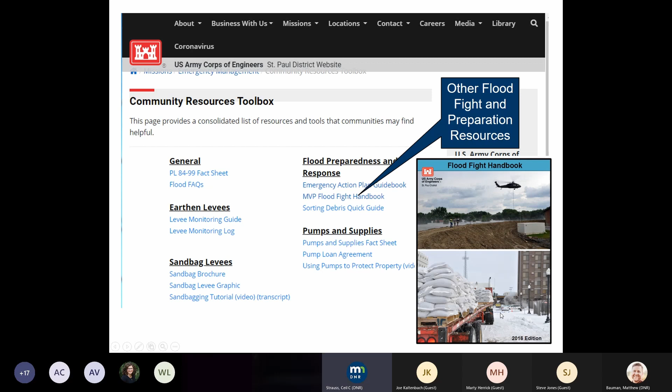The other thing they've got on this page is a link to some community resources, a community resource toolbox, and their flood fight handbook. That's where you get into more of the nitty-gritty on putting in levees and sandbag dikes and those kinds of things, and how to request resources. There's a lot of great details on flood fighting there, and they've got things like a video on how to do sandbagging. So some great resources there.

At the Department of Labor and Industry, this page gives resources on how to get help from other building inspectors from around the state, or how you can volunteer to help around the state if you're a building inspector. They do have a link to their manual, which has been updated several times over the years, and they just updated it in the past year. So if you haven't gotten the most recent copy, you might want to go grab that and review it for your community.

So a few other reminders of things you want to be looking at: communicating in your community. Who is most at risk? You know your community best. The level of risk varies a lot around the state and even within communities, so think about who within your community is most at risk, and what kind of messages they need to hear.

Some points you might want to include when reaching out to businesses or homeowners: making them aware of where they are within your high-risk mapped areas or locally known risk areas, because FEMA doesn't map all the risk areas. There can definitely be ponding areas or low areas without adequate stormwater management, or stormwater ponds put in for newer developments that could be a risk.

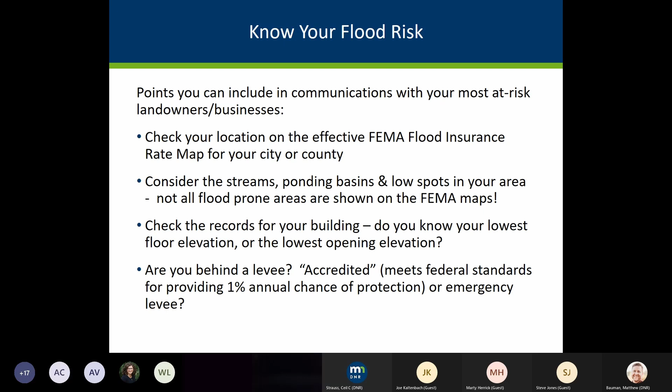Some other things to recommend to folks most at risk: consider getting flood insurance if they don't already have it. As long as your community participates in the National Flood Insurance Program, they can get a flood insurance policy. It may have been mandatory if they were in the FEMA high-risk areas, but anyone in the community can get a policy as long as your community is participating.

Look at making sure they have their records backed up off-site, and that they have an action plan to keep their business going or protect it so they can get the business started again as soon as the flood goes through the community.

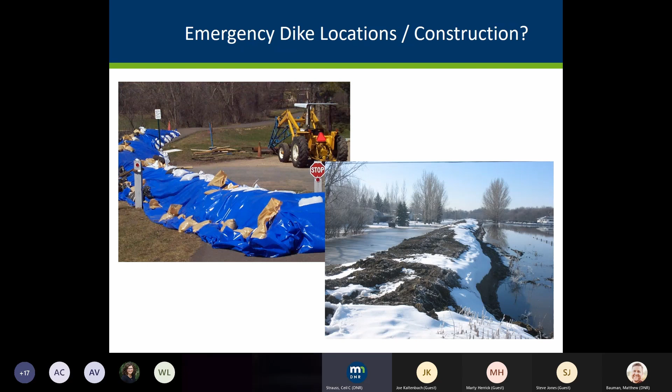So some other specifics for you at the community level to be thinking about before the flood, or when you know the flood is coming closer: if you have places where you need to be putting up barriers or dikes, know where that is in advance. You may have places where you traditionally do diking, but think carefully about where you're doing that. Make sure your levees and temporary dikes are not going in the floodway areas.

Here's where the floodway would be on an older paper map and where it would be on the newer maps, these blue and red crosshatched areas. If you put dikes in the floodway areas, you're causing increases in flood elevations beyond what's shown on your FEMA maps, because the modeling assumes those areas are left open for floodwaters to pass through your community. We mention this because we know there have been communities in the past who have put sandbags and temporary dikes in their floodways, and we don't want you doing that.

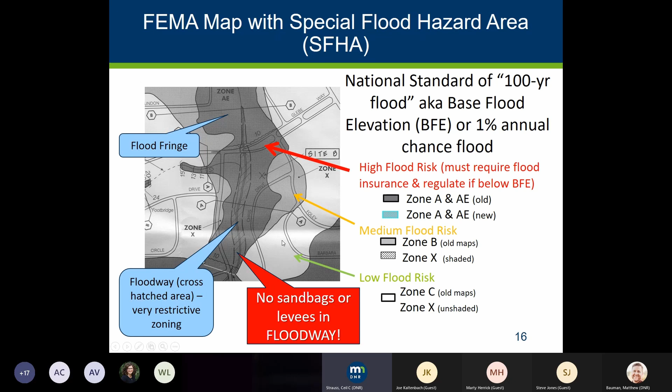Think about your critical facilities and which ones of those are at risk. Especially if you've got nursing homes, hospitals, prisons, or places with vulnerable communities, do they need to have evacuation plans in place?

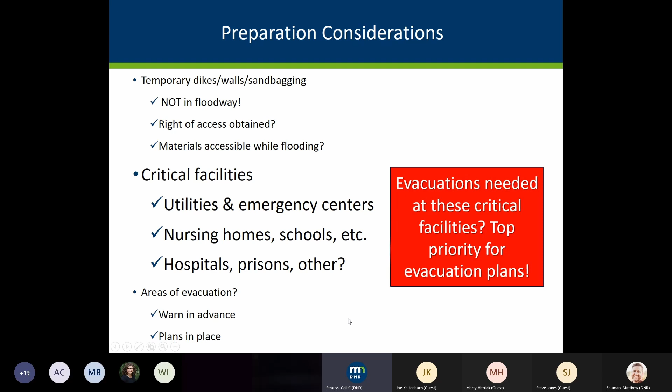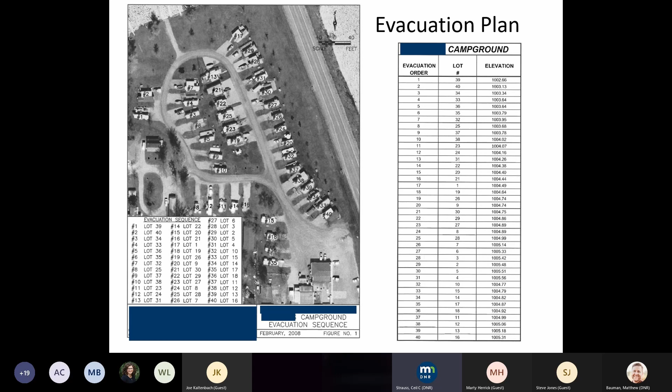A lot of this is covered again in our second video on response after a flood, so we'll talk about a few different things here. The community's first responsibilities are, of course, rescuing people. Your first responders and emergency managers are going to be out there rescuing people.

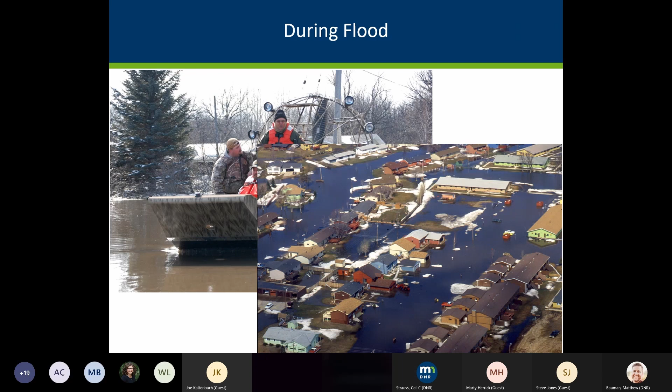While rescuing folks too, you'll get a good idea of where the areas of damage are. You'll be getting reports of damage. You'll be trying to block those parts of the road that are most at risk.

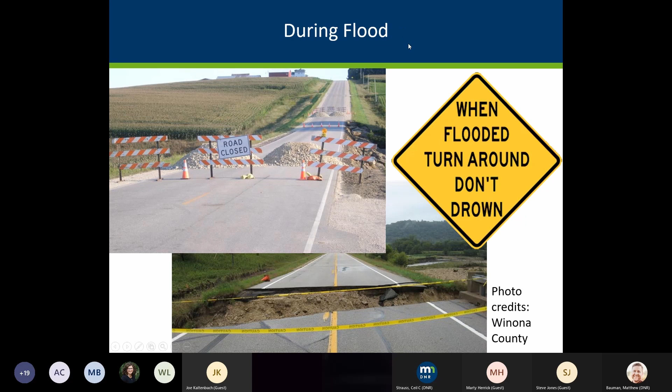A reminder that when there is flooding, the areas on the road that are covered by water - you don't know what's beneath that water surface. It can be a really dangerous situation, like here where the bridge is completely washed out, and obviously we don't want cars going through those areas. Just like nationally, in Minnesota most deaths due to flooding have been because of people trying to drive through places that maybe would have been fine during normal times, but were washed out - and that's where we're most likely to have the dramatic rescues and deaths during flooding.

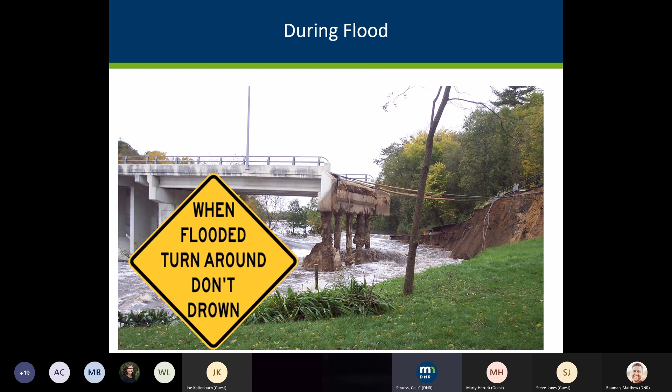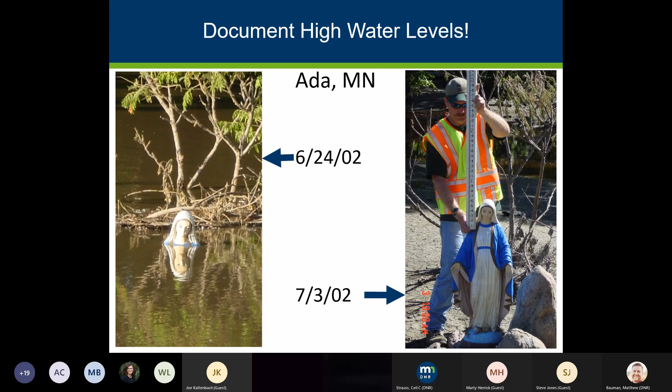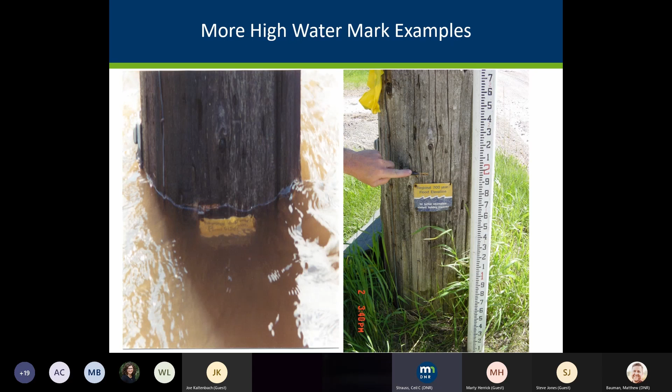And so this is an example where they put a stake, showing the flood relative to one of the official elevation markers. People will want to know how high the water really got after the flood when you're trying to figure out what the damage was and where the areas were damaged.

We encourage you to set things up ahead of time and have a way of recording what volunteers and staff are spending time responding to the flood, because you'll want that information if there is a state or presidential declaration made.

Your communications to your community are really going to be important. We've got more options now in terms of websites and social media sites, and that's definitely heavily used in more recent floods. You'll be wanting to get information out immediately about where to avoid, where the flooding is, where there's risk, where to stay away from.

And then as soon as this water starts going down, people will want to know what to do with their debris. You'll want to tell them how to schedule inspections and remind them that they need permits to do repairs or to go in and rebuild anything in your community.

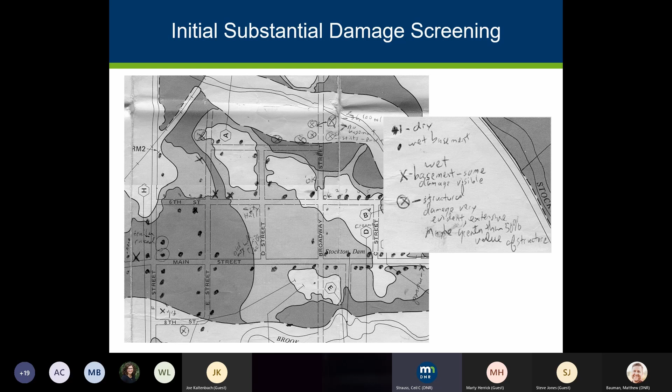One of the first things you'll be doing, in addition to the safety actions, rescuing people, and blocking areas of concern, is trying to record where you're seeing the damage. It might be in a small community something unsophisticated like this handwritten document that was done in this example by the local official and the area hydrologist at that time.

But more and more communities have GIS and are able to show that in a nice GIS format and flag properties, flag parcels, and tie it to more detailed examples. This is actually getting to be like a decade plus old example from Steele County.

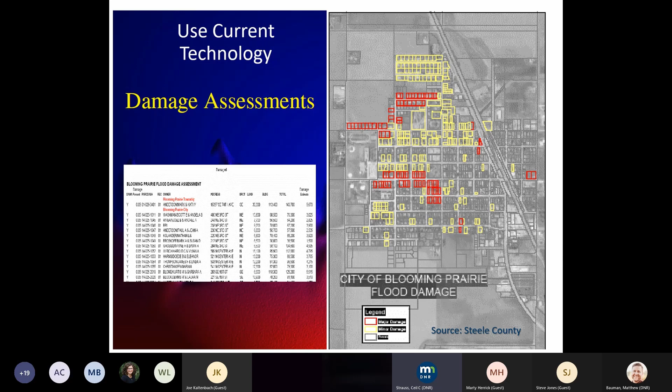First step is that you're going to be looking at whether buildings potentially are damaged and if they need to be regulated by you through your floodplain management ordinance.

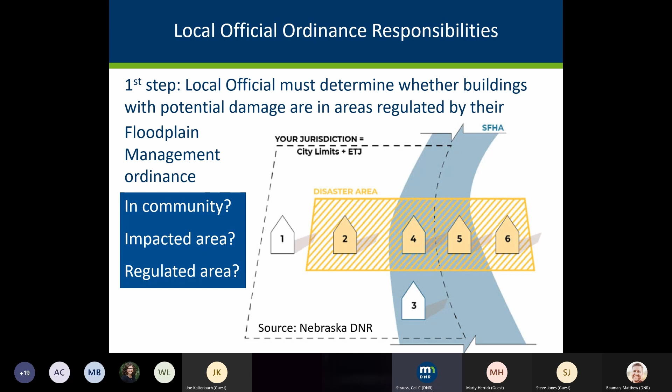First thing you look at is, is it in your community? And is it in the area that was impacted where you think there might be damage? Within that impacted area, in this example, buildings 2 and 4 are in the impacted area and within the community, but only number 4 is actually in the regulated area. The blue area is supposed to be the regulated area, the special flood hazard area. So that's where you need to make sure you're doing inspections for substantial damage and determine what is allowed to be done according to your floodplain management ordinance.

We do have this flow chart that gives some of the same key steps. This is an older document, but we still have a link to that on our website, and it steps you through, reminding you that you want to get out as soon as you can and figure out which buildings need to be looked at more closely that are within your mapped high-risk area that are subject to your floodplain regulations.

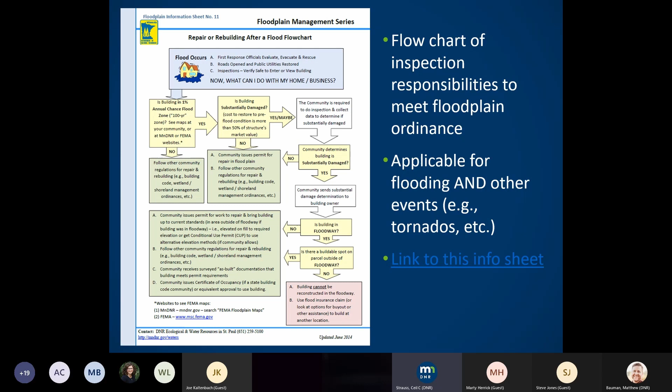When we talk about substantial damage that you're required to look at, we're looking mainly at those existing nonconformities, the things that were built before you had your map. They weren't built knowing the true risk, and they may have been built too low. But if there's damage of any origin - it could be a flood, a tornado, a fire, whatever causes the damage - if it's damaged to more than 50%, meaning the cost to repair that building to bring it back to the condition it was in before the fire or flood is more than 50% of the market value of the building, then that is considered substantially damaged.

Your ordinance says that a building that is substantially damaged needs to be brought into compliance. What's distinctive here is that it's not just the work that is actually done or that they want to do to repair - it's what work has to be done to bring it into the pre-event condition. They can't say, I'm only going to repair part of it and stay under the 50%. You need to look at the full cost to repair that building. We'll get into more detail on doing substantial damage determinations in a little bit.

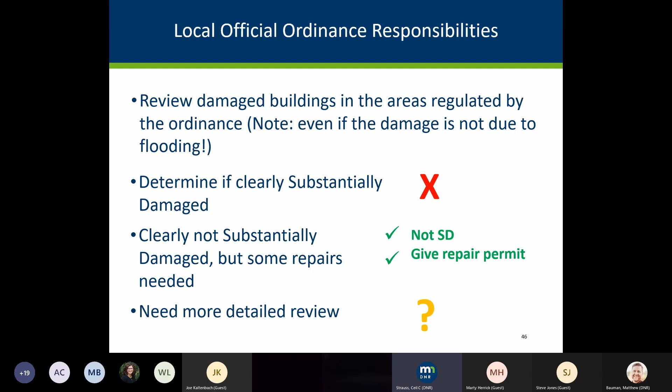So you'll be looking at all those impacted areas, and as you're out there screening, you may find other areas that you didn't initially identify.

So one of the big things after floods is looking at where those piles of debris are. That's a very good sign that there's damage in those buildings if there's piles of debris outside the homes and businesses.

So some of those substantial damage determinations will be really easy to determine. You'll see that the building is clearly substantially damaged.

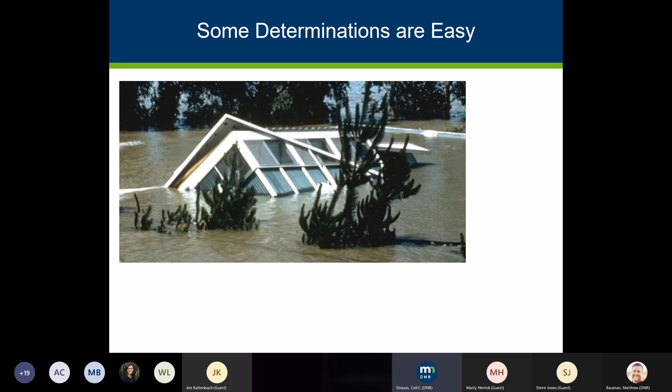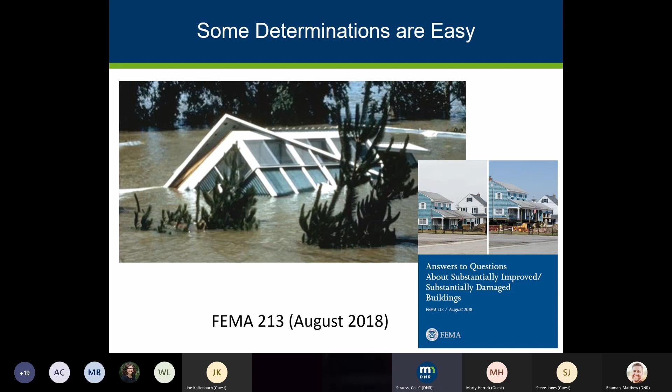This is just a reminder that there's one of the resources available, kind of an abridged version of the FEMA substantially damaged building guidance, and that's this FEMA 213.

Next slide. In basements is where we'll see a lot of the damage during floods. You want to capture those stain lines. In this example, we've got a seed line that they marked.

You're going to want to have a system set up that you've got information by each address, and you tie your photos to those addresses and your inspection records to those addresses.

In most cases, again, there's going to be some cleanup to do, and you'll be sharing information on how to safely clean up and disinfect those areas, but you can give them permits to do the repairs and do the cleanup.

Unless you see foundation damage in a basement, you might see that the furnace or the water heater is going to have to be replaced, but you don't usually see substantial damage situations there. Again, document, document, document, and keep those records by address.

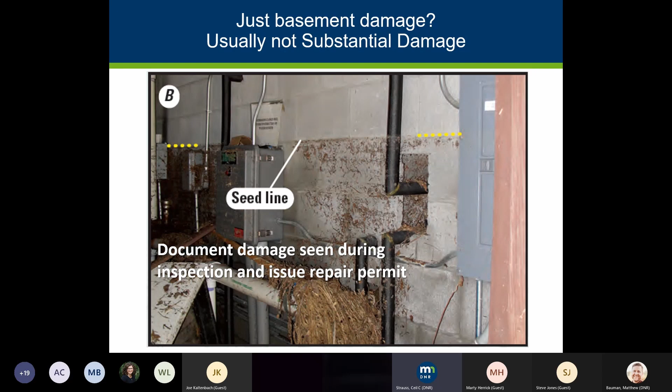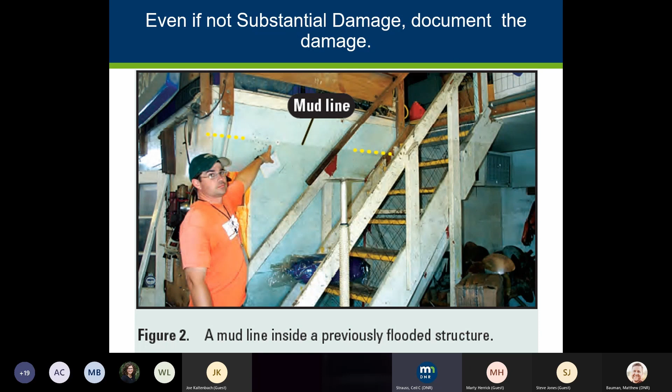So sometimes things are not what they seem from the front. Here we can see the mud line, the high water mark from the front.

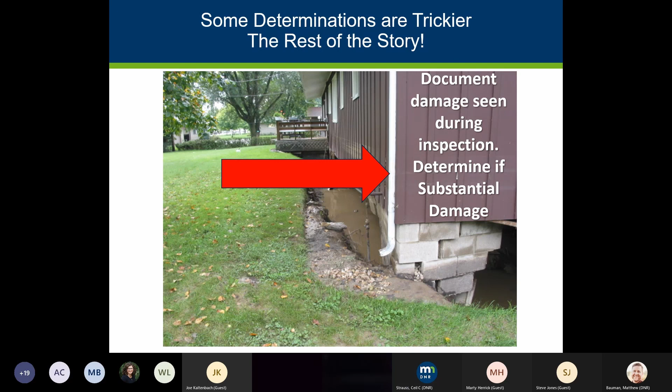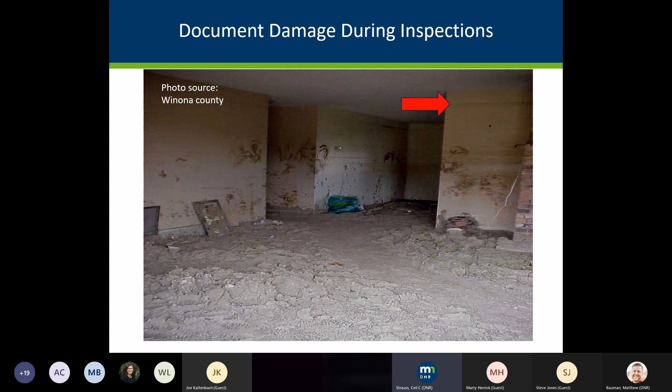In our playbook, we do have some tables, some depth damage tables. These are based on some analysis that the Corps of Engineers had done earlier. Many of the states use these depth tables to help narrow down which areas need to be looked at more closely. So it does vary depending on the number of stories and the foundation type.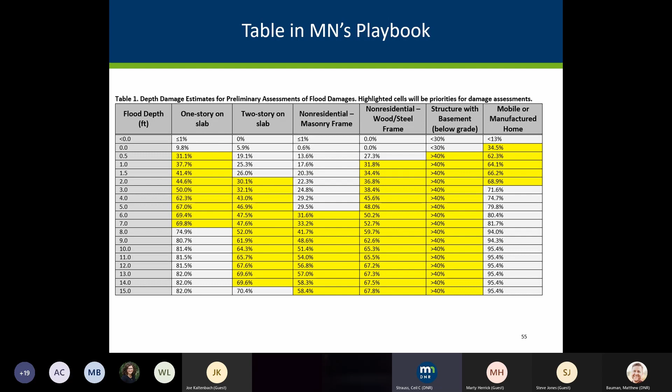This shows the 1 story on slab, 2 stories on slab. Go to the next slide.

So zooming in here on the 1 story on slab, if you've got basically more than half a foot of flooding on that 1 story slab, you're going to need to look at that more closely for whether it's substantially damaged.

Again, if it's just in the basement, it's probably not substantially damaged, but if it's getting onto that main floor, that first floor above your basement or crawl space, then you're likely to need to look at it more closely, and it's more likely to have been substantially damaged.

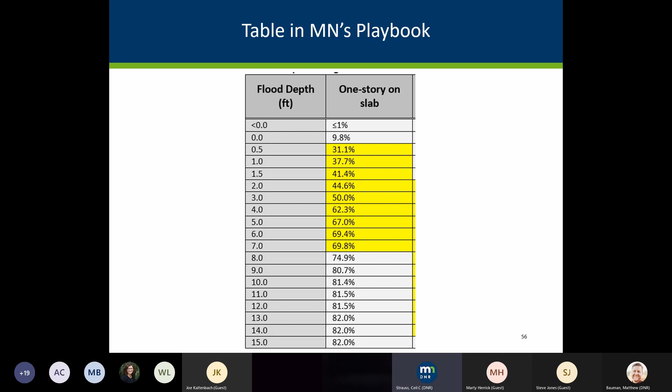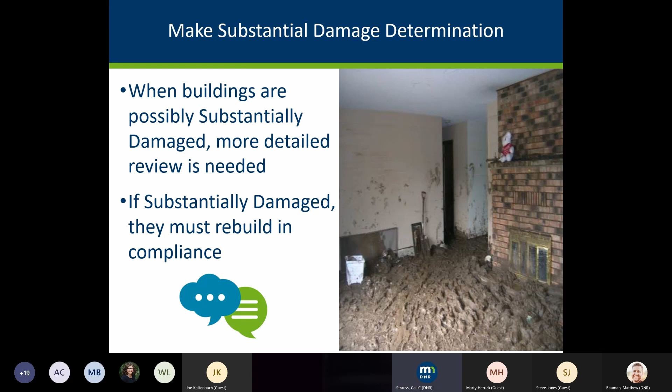You're going to need to document more closely when you get closer to calling it substantial damage, because you're going to be telling people they've got to rebuild in compliance, that they're going to have to elevate that building or do some kind of flood proofing, doing some major work in many cases. So your documentation is going to be especially important in areas where you're going to have to tell them they're substantially damaged.

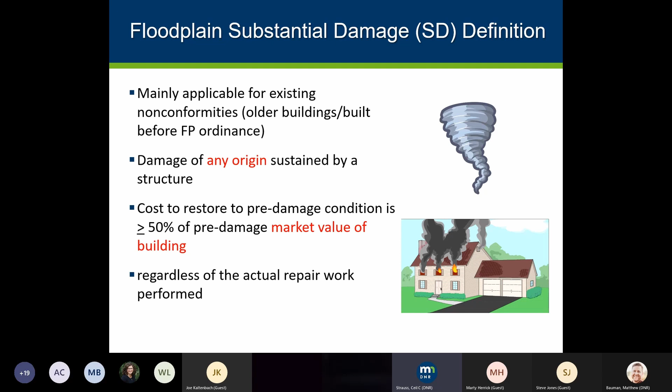Again, substantial damage is any origin, and you're looking at the market value of the building. You're not looking at the market value of the whole property, just that building, and what the cost is to do the repairs, not the actual work they want to do.

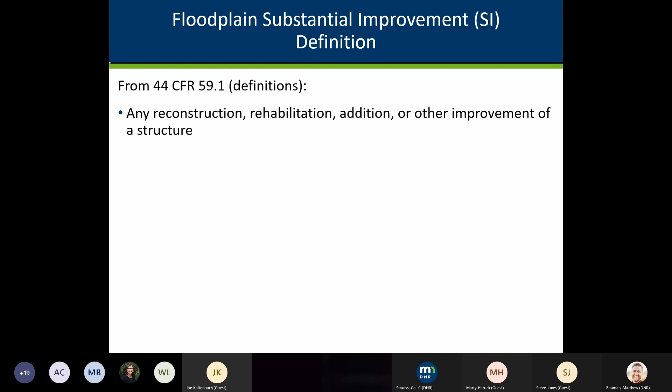This substantial damage definition is part of the substantial improvement definition in the FEMA code, 44 Code of Federal Regulations, definition section 59.1. That defines it as any reconstruction, rehabilitation, addition, or other improvement of a structure, and includes the substantial damage.

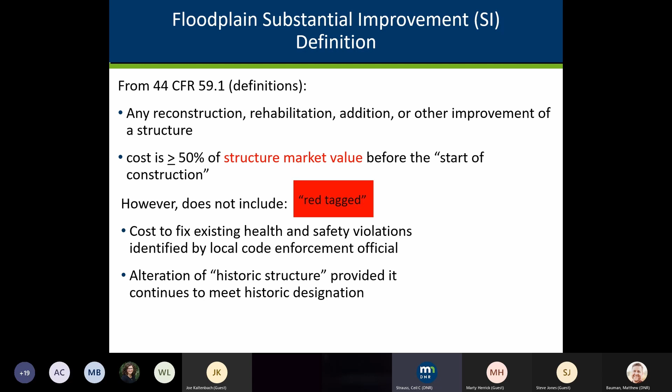But when you're figuring out the cost, you do not have to include pre-existing health and safety violations that have already been tagged by the community. If your building inspector's already tagged their electric or their furnace and said that they have to replace those, then the cost to replace those don't have to be included in the cost to bring it into the pre-market or pre-damage condition. And also there's some specific guidance for historic structures.

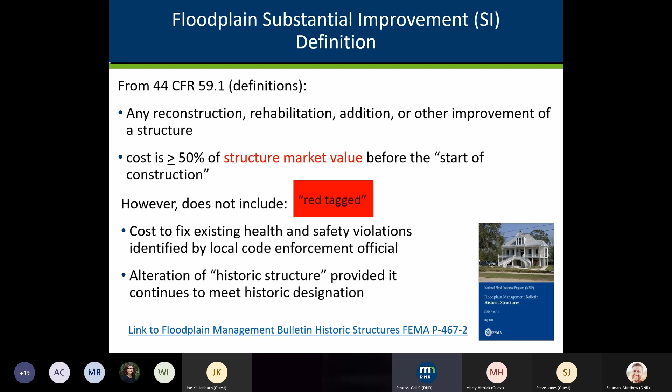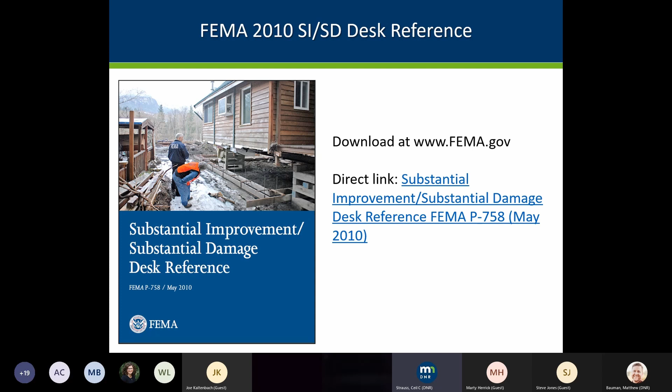FEMA's got a nice document on historic structures and how to handle those when you're looking at damage to historic structures. And overall, for substantial improvement and substantial damage, the FEMA desk reference is a very valuable resource. It's about a half inch thick, so you'll want to just go to the parts that are most applicable for you, but that's got a link to the whole document.

Within there, it's got some nice flow charts, points you to the parts where you need to be looking. So you'll be first looking at what is that market value, what's the cost to do the repairs, and how does that compare to the market value, and do you need to have them bring the whole building into compliance?

Estimating that market value is key. You'll want to be consistent on how you do that. And again, you're looking at the building itself, so you're looking at the market value for that affected structure. You're not looking at the cost to reconstruct the building. You're looking at what the market value is.

And I know that in parts of the state, that can be a real difficulty because the market values have been depressed in some areas during the times of floods. And the market value might only be $50,000, so over 50% doesn't take a whole lot of damage. But that's what the law says is the market value. It's not the replacement cost value that you're comparing things to.

What you'll look at is what your assessor has for the market value for that building. And in some counties, you may need to make an adjustment to that assessed value. If market rates have been going up really fast, you might need to do some kind of an adjustment to get that assessed value to be the market value. But the key thing is to be consistent on how you determine those market values.

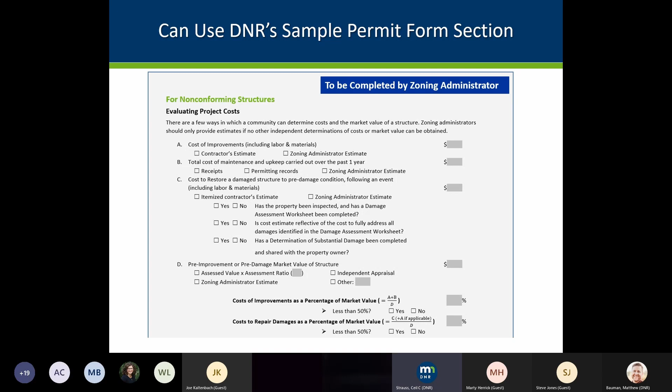Back to the FEMA guidance, that desk reference, they've got some nice specifics on what you have to include in your costs when you're figuring out the cost to bring it back to the pre-damage condition. A couple of the things that people try to not include that you're going to have to remind them they must include are the value of the materials.

They can't say, well, I had this sitting on my neighbor's, I took some stuff that my neighbor had extra, or my church donated my materials, so it was no cost to me. Or I just had a bunch of friends come and my cost was a couple cases of beer. That's not what the cost is you need to use for the calculations.

You need to look at what the cost would be for a contractor in your area to do that work. So the actual value of the materials being used, the value of the labor, and as FEMA's list of specifics points out, what a contractor's normal overhead and profit would be. Essentially, what it would cost to have a contractor do the work, not someone saying, well, I can do this for $1,000.

FEMA's guidance also gives some nice specifics of the things that don't have to be included: the cleanup costs, things that aren't part of that building, other accessories, or the swimming pool or a separate deck. Those don't have to be included in the calculations.

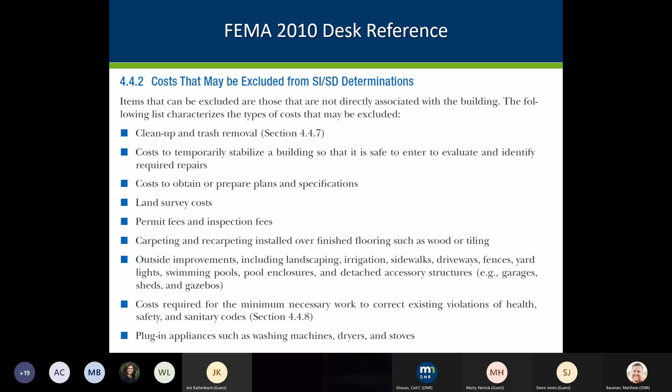Once you've made the determination that it is substantially damaged, you need to send out a formal letter, preferably on community letterhead, saying we've made these determinations, we've determined you are substantially damaged, you must bring the building into compliance. Include a paragraph reminding them or advising them if they have flood insurance that they have the option to use their increased cost of compliance part of their insurance policy.

So I mentioned the ICC. Anyone who's got a national flood insurance policy, a part of that policy that's been in place since about '94, is something called increased cost of compliance. FEMA recognized that we're saying you have to bring your building into compliance if it's substantially damaged, so there's an additional cost to elevate that building, or to move it to another part of the site, or for demolition and rebuilding in another location.

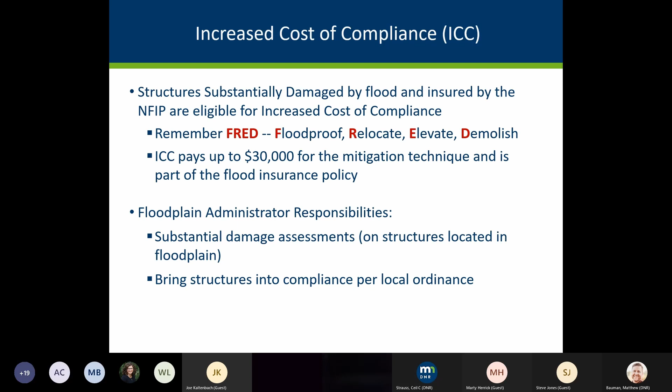Then a reminder that the ICC is triggered if it's substantial damage, the normal substantial damage greater than 50%, that has to be in your ordinances. But then we've got some other language that we've had recommended in our model ordinance since about 2014.

We have language about repetitive loss triggering substantial damage consideration. That's specific language used for the ICC to kick in - in addition to just 50% damage from one event making you eligible for ICC money, if you have 2 flood-related damage events within a 10-year period averaging 25% damage, between the two they add up to more than 50%, making them eligible to get up to $30,000.

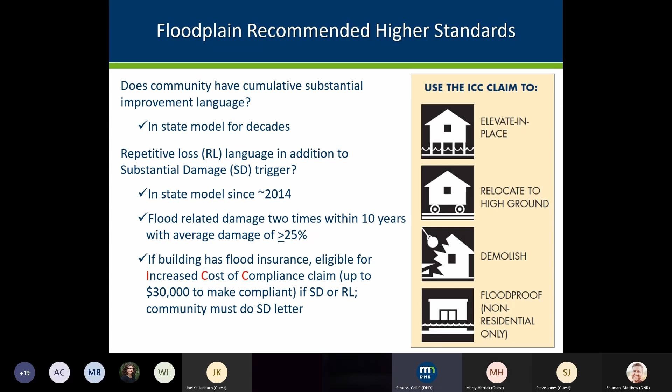So again, this makes them eligible for elevating, relocating to higher ground, demolishing, or doing some floodproofing if it's a non-residential building where that's allowed.

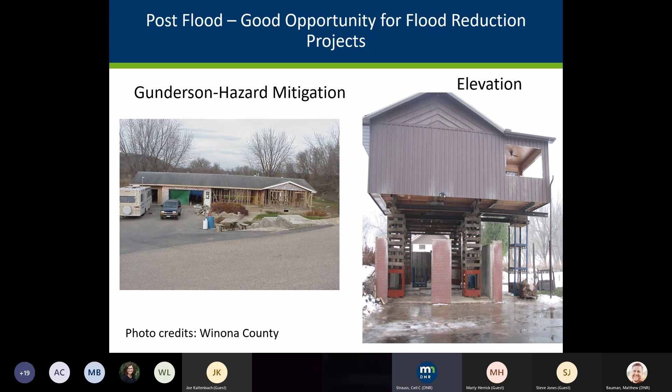Another example of a Minnesota elevation project in progress in Winona County. I'm pretty sure this is an example where they used ICC money.

Another reminder: for some things you can only encourage them to build safer. For instance, if in that basement their furnace or water heater is destroyed and they need to replace them, that may not trigger substantial damage for the building, but you can certainly encourage them, since they have to replace it anyway, to move it to a safer area or protect it for the next flood. You may want to consider community language requiring that utilities damaged and replaced due to an event like this be brought into compliance.

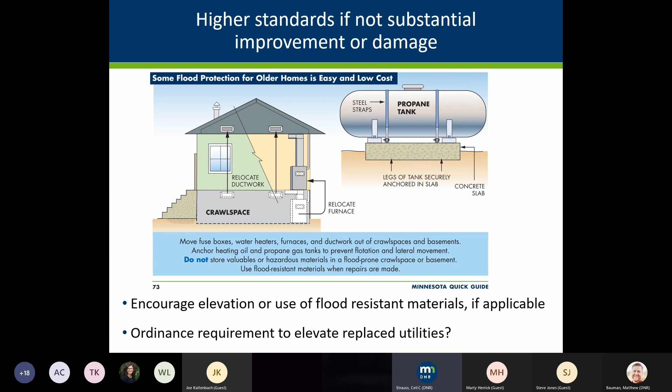We had communities that after the 2012 flood thought they could require people to do this, but when they got pushback, realized their ordinance didn't actually require it, so they could only strongly suggest. So before your next big flood, consider stronger language to require that.

Some other things your community will be responsible for, in addition to inspecting buildings to see which ones are substantially damaged and giving permits for repairs, is being out there looking at damage to your public infrastructure.

If there's a state or federal declaration, you'll be working with Homeland Security Emergency Management folks and your emergency managers, filling out applicant worksheets and going through that process, getting instructions from Homeland Security Emergency Management. I know Wayne was listening here, I don't know if he's still on, but those are definitely the folks you want to be listening to and following their regulations.

The other thing is making sure you're getting applicable permits if any repairs involve, say, replacing culverts or bridges or things that involve a DNR permit.

We're just going to blow through a few of these last slides here, Matt. Remember looking at your all-hazard plan, I mentioned that at the beginning—you should have some priorities there of what to do after a flood, and mark some areas of mitigation priority.

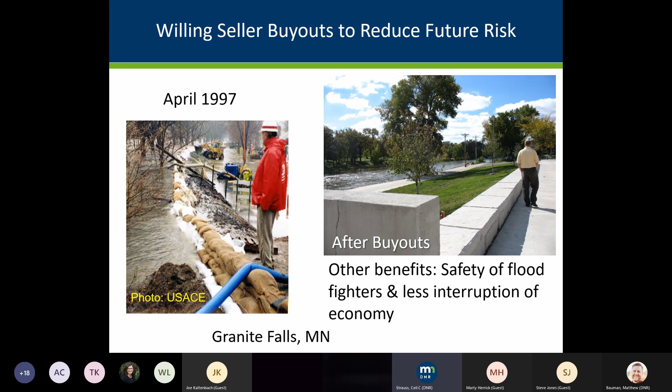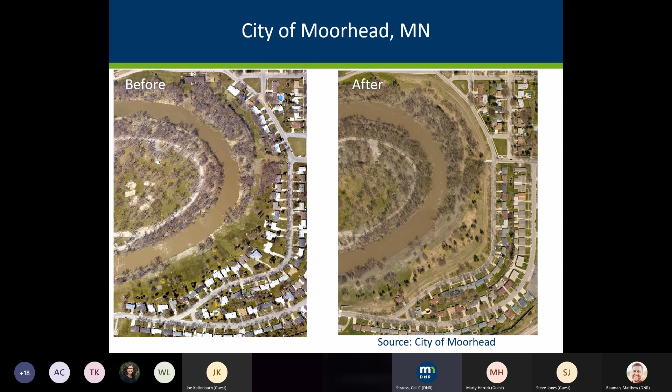A before and after in Moorhead, where they did things more at the neighborhood level. On the left side, you can see buildings that were on the riverside. On the right side, those riverside buildings were bought out, and there were community-level levees built along the river to protect the remaining homes.

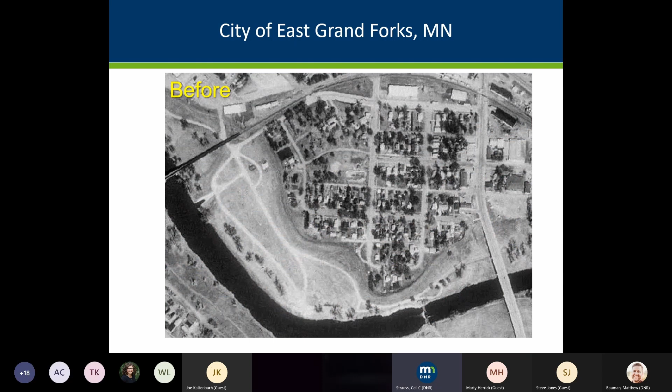East Grand Forks is a great example where we had extensive flooding in 1997. Here's a picture of East Grand Forks at that time, showing the before picture.

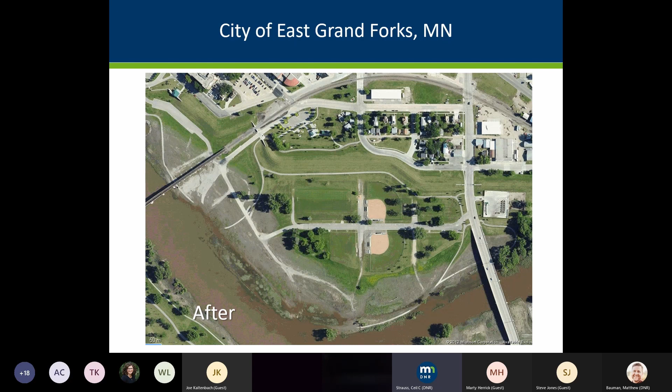The after picture shows the levee pulled back from the river, those higher-risk buildings bought out and replaced with recreational facilities and things that won't be damaged as much, and certainly won't put families at risk during floods. A very nice big project that helped reduce risk in the area.

So thanks, Matt, for running my slides. I don't know why my connection was so bad again—the last couple presentations I was able to do just fine. So we'll stick around and we can stop the recording.